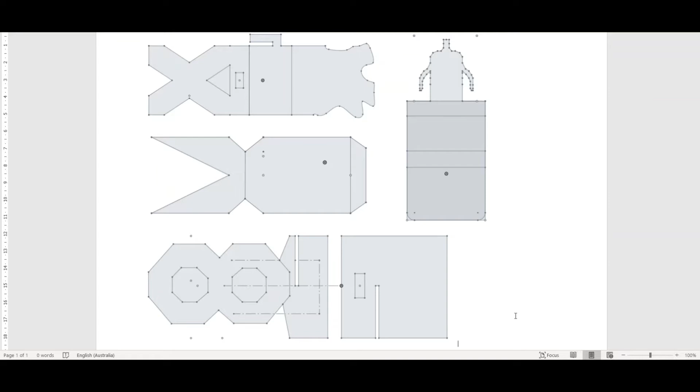So first things first, you guys must have a paper model done. Make sure that your paper model has everything cut out of it that you need to cut out. You've bent it into shape so you know where all the bend lines are. And if there's anything that's going to be engraved on it, maybe just make a mark or a note somewhere so you know to leave enough space for the engraving.

But other than that, the measurements are really important. So measure the piece of paper so you know what measurements everything needs to be, so then we can use these measurements in OnShape. I'm going to draw up my one just to use that as a bit of an idea, but obviously everyone's is going to be slightly different, but the general gist is make sure that it is to scale and that you're using the dimension button on OnShape.

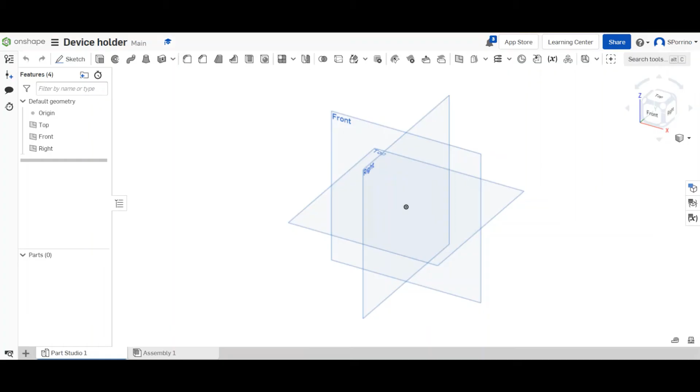So first things first, top plane is what we want to sketch on. I'm going to click top plane, go to sketch, and then as a suggestion, I would get everyone to draw a center point rectangle, but make it a construction line. So turn on construction, turn on a center point rectangle, and then draw a rectangle from the center, and then make this 295 by 105. Enter, enter.

And that is going to be like the maximum amount of acrylic that you guys can use, so whatever you draw needs to be within that rectangle. I'm going to click the green tick and then just leave that in the background.

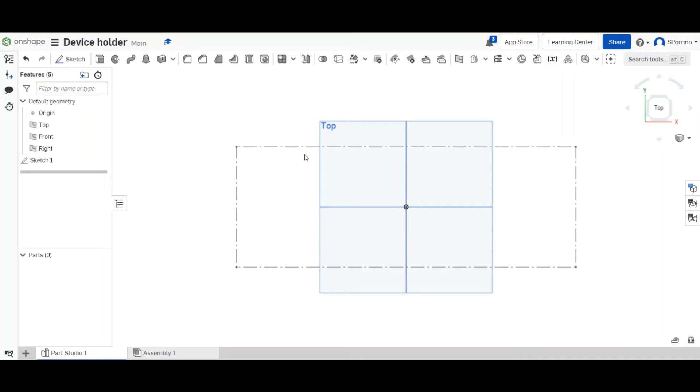So what I need to do now is create another sketch, also on the top plane, go to sketch. I'm going to actually move this little window just to the side, and I'm not going to click that green tick until I've drawn every single line that I want. Essentially your whole outline and any lines that need to be cut out or engraved, we need to sketch all of them first, and then when you're finished, then you can click on the green tick to finish it. But in the meantime, I'm not going to click that until I've done literally everything.

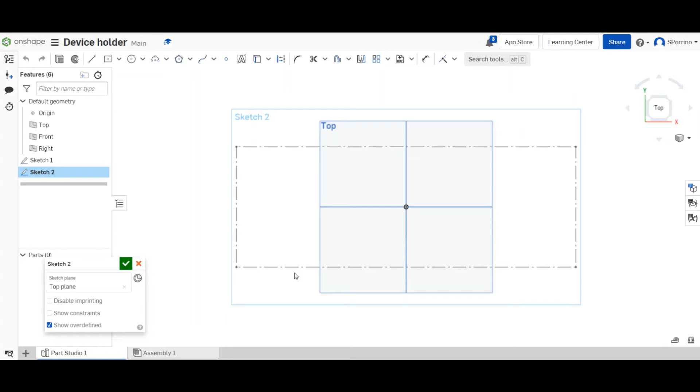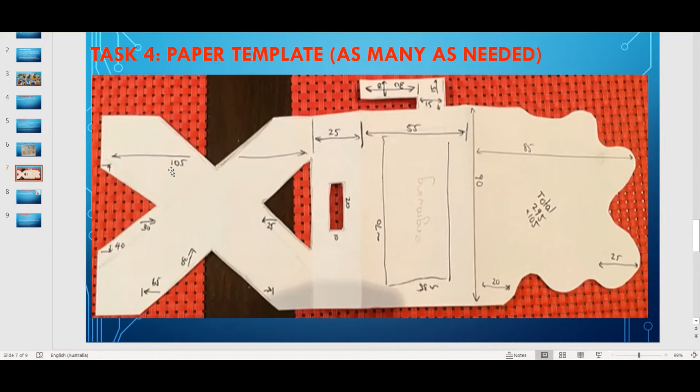So for starters, I probably want to put in some dividing lines where I know all of my lines are to be able to bend. For example, mine, I need to have 1, 2, 3 lines that I know are where I'm going to bend my piece of acrylic, and I know what measurements they need to be from each other. So I've got like 105, 25, 55 across the top here.

So basically I can draw some lines and I can use the dimension button to then set that a certain distance. From here I can click and click from there and then set that to be what I need that to be.

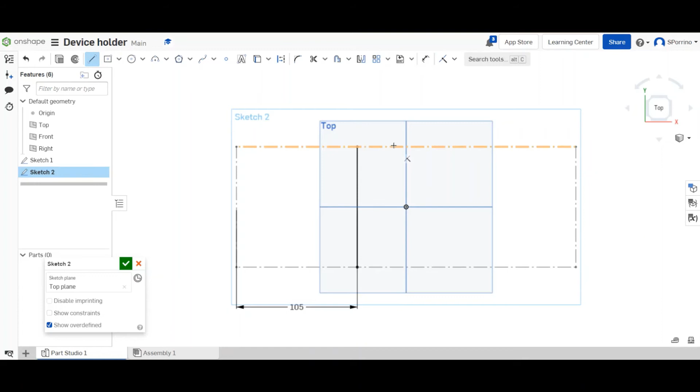So like I said, everyone's is going to be different, this is just for my one. So that's 105, and then I know that from that line, I need another one, which is going to be 25, and then one more, which for me is 55.

And then whatever's left over is whatever's left over. So that's a good place to start if you know all the lines that need to be bent. If you need to work out anything else, using construction lines is really handy.

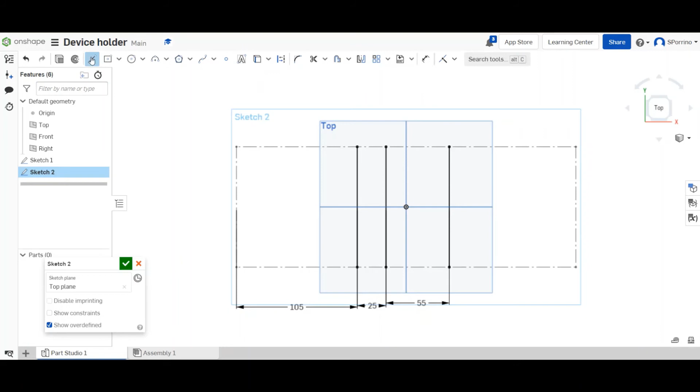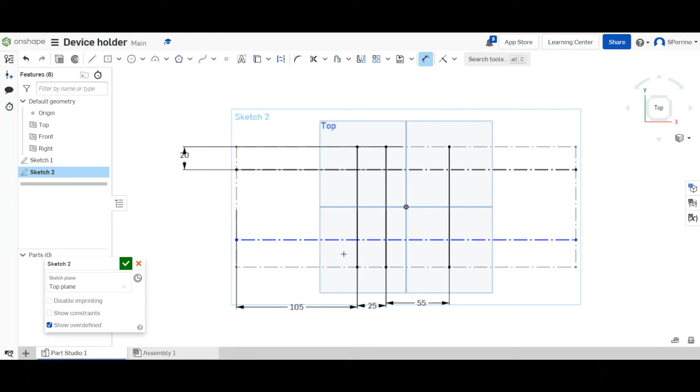So lines, construction lines - let's say that you're going to cut in a little bit, like 20 mil or something. If you draw a construction line and then set that to be the measurement that you want, you're basically creating like a grid to kind of work with. So construction lines and using the dimension button to go from two separate places is really handy.

Other than that, using lines, using the spline tool, circles, rectangles, whatever the shape is that you are trying to draw, use all those tools to be able to do that. So I'm going to do this really quickly now.

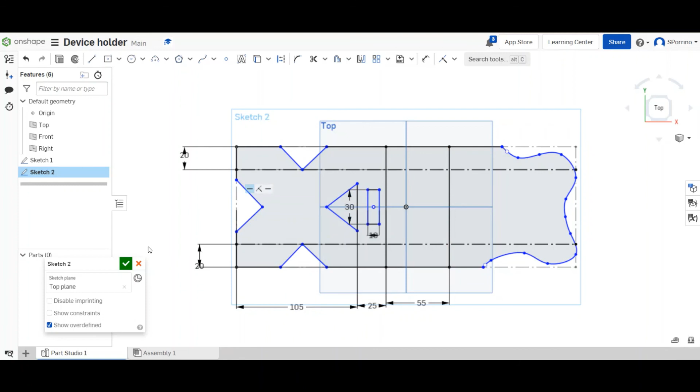So if there was anything else that I needed to add to this, I could. And then when you are done, you can click on the green tick and that'll okay that sketch. So then eventually sketch 2 would be the thing that we need to export as a DXF to put that into Illustrator.